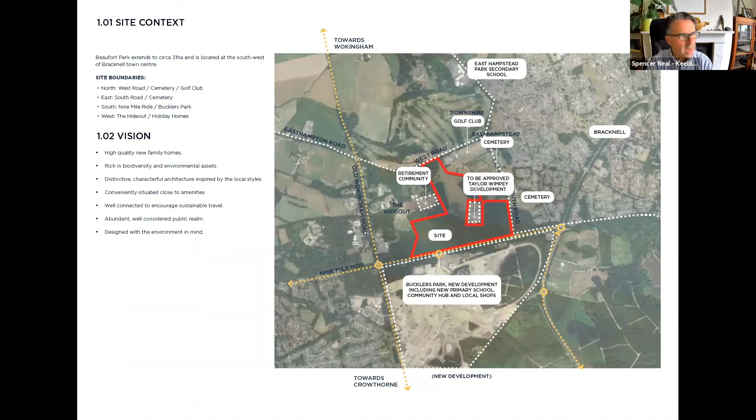I think we can move on to the next slide, which gets into a bit more detail. Can you talk us through this? Yes - this is a little diagram representing the overall site boundary. You can pick out the words 'Nine Mile Ride' at the bottom, which is one of the bounding roads. To the right is South Road, running north-south, and at the top is West Road. So those are the three main roads that constrain the site.

To the south, you have a very strong tree boundary of the commercial timber plantation, and there's an image on the side giving you the sense of a country road. This is really important for us because we feel it should permeate through the entire development as a design process - keeping it landscape-led, with a natural feel, so there's no sense of development nearby. People driving down Nine Mile Ride won't actually see any difference.

So the sense, what they see there on the left-hand side is pretty much what they will see in the future. The only difference, however, is the main access, and that's where the roundabout is to the west of Nine Mile Ride, and that will be the entry gate, and that's where you see that little bit of white gap along the

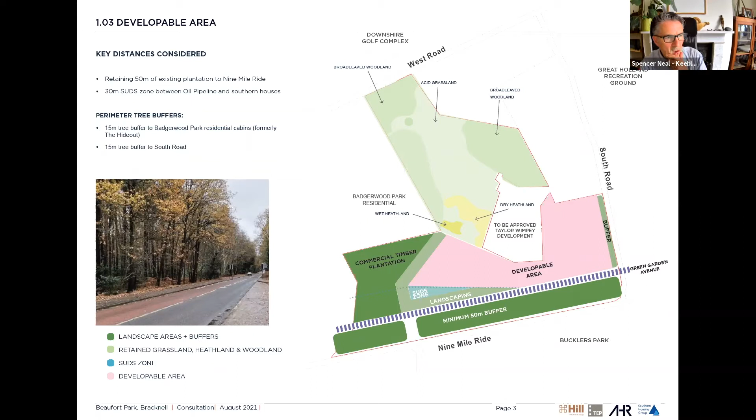So this is where we start talking about the connections and the permeability of the developed area and its links with the wider community. We've had a question from Janet, essentially about our reference to local amenity, Bucklers Park, which I think is the Cala Homes development. But the query is those are not actually planned. And I'm wondering if anybody is able to answer: what will people on our development be able to do for local amenities?

So sorry, what was the query there? So the query is that we've made reference to amenities at Bucklers Park, but there's nothing actually planned, and I'm not sure what your plan is or your thinking is as to how to make sure that people living at Beaufort Park are able to access amenities, which I think is a good question. Yeah, no, very good question.

So one of the things we're talking about at the end is timescales, and obviously the Bucklers Park development is quite a long way ahead of us already, and a lot of that development is coming out of the ground already, and the infrastructure to come alongside it is also on its way. So by the time that we are, if planning permission is granted, by the time we're actually building out these houses and people start living in it, Bucklers Park will be substantially complete.

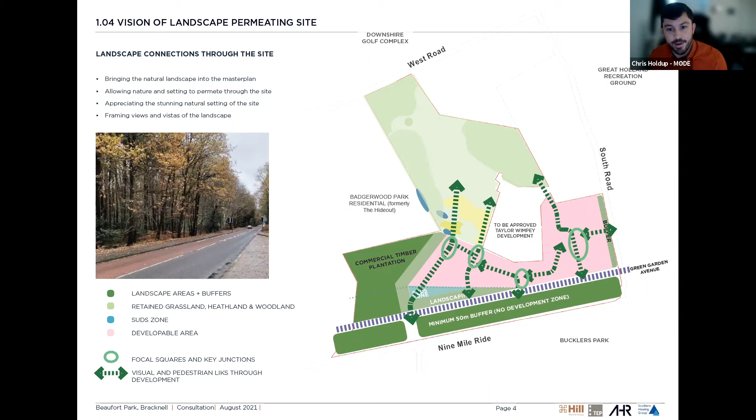Happy to answer that one, Spencer, that would help. We've been alive to that one all along, and really it's a good reason why the high quality roundabout access, in the way that we're showing it, would mean that you don't expect that to happen.

What I would say is that a comprehensive transport assessment is being submitted with the planning application. We'll be making use of the council's own strategic traffic model, and if there are things that don't quite happen as expected, that'll get picked up and we'll make sure there aren't any undue impacts as a result. But we're not expecting that to happen.

You provide a roundabout, as you can see there, and the ability to get off South Road and straight down to Nine Mile Ride. It's about getting onto Nine Mile Ride and keeping the free flow of traffic along there, not having rat running along other places.

Will you be doing any kind of movement assessments, traffic assessments as the project progresses? Because people are asking, as you can see from the questions coming through from Janet and an anonymous attendee, a number of people have been asking about the increased traffic. I suppose the obvious answer is we'd need to know how much we expect the traffic to increase by. Do we have an answer on that yet, or is that coming later?

Yeah, we absolutely have an answer on that. Not a day goes by at the moment where we're not looking at that, and we're working very closely with the highways team at Bracknell on how we assess it, because it's really important — important for this planning application and for their local plan, which is why they have a strategic traffic model. They've had that for a number of years and continue to use it, including for the local plan and for this site.

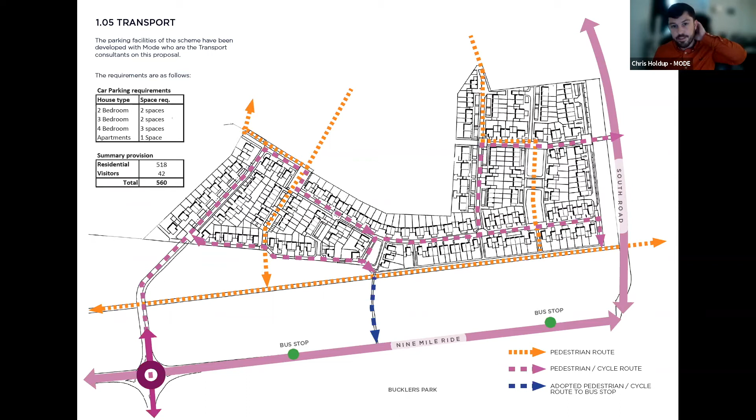All of that will go into a comprehensive transport assessment, and we'd encourage anyone interested to have a good read of it when it goes in. It'll be very detailed and will pick up on potential concerns about increased congestion. We will be generating more traffic — it's extra housing, and that's what happens, isn't it? But it's about checking, making sure nothing untoward happens, and if we need to mitigate, we'll be doing that as well.

Okay, no, I appreciate that. Perhaps there's another query. People are very interested in the SANG, and we will come on to that later, including the routes through to the SANG and from our SANG and safeguarded land through to neighbouring SANGs.

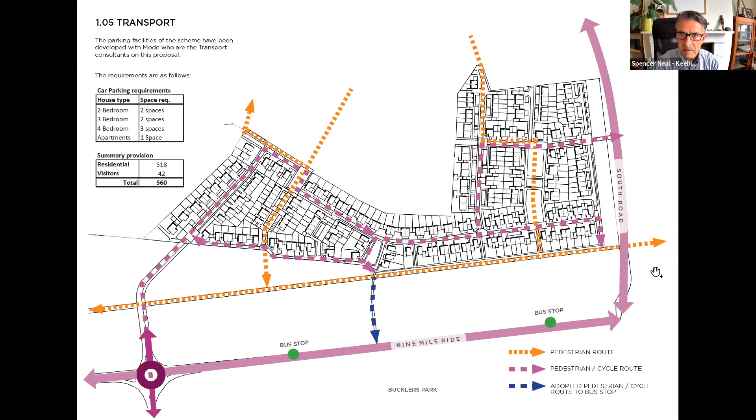But if we just move on to the next slide. Thank you, Chris, that's really helpful. I think we come again more to the creative design element, which I think I can ask Spencer to just talk us through a bit.

Sure. You've got a bit more definition here in terms of your thinking on the house types. Well, first of all, I think it's important to say this is an indicative master plan, and this is how we've distributed the family homes here. The family homes range from 2 beds to 4 beds.

There is a very small sliver of apartments, but these are 2-storey and walk-up, so each apartment has its own private entrance, as you can see in purple there. But just to lead you through the master plan, to give you a sense of what we're trying to achieve, if we go from the roundabout with the arrow, there you go.

Then as you go up and you pass the plantation, and then you take a right bend, and on this bend, you see on either side of it an expanse of open space - it's the attenuation basin and play areas. So it creates a very attractive space.

We had a question on those attenuation ponds - how does that contribute to the management of water, and what's the risk of there being increased flooding, for example, at the Bucklers Park residential area?

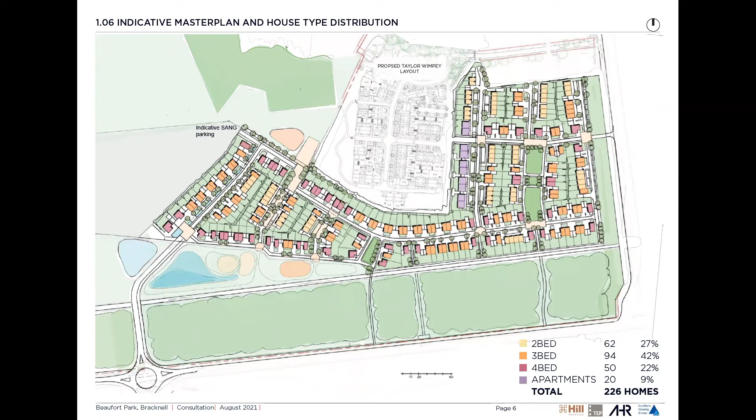I guess it's something that can be discussed with the council as to whether there's any opportunity to perhaps incorporate improvements off site. For Seth, as responsible for delivery - one of the concerns is also that during construction and site enabling works, can you do anything with contractors to stop them from clogging up local drains?

Even for the construction period, one of the questions in the Q&A is about the sensitive boundary to the cemetery. As you can all expect, we can't promise there will be no noise during the construction and delivery of these homes, but we have a number of tried and tested methods to minimize noise disruption during construction. A specific example being air compressors, which can be very noisy, using silencers for them really helps bring down the noise. We also have deliberate plans to avoid having deliveries at peak times and other things like that, so it's something we're very live to from a delivery perspective.

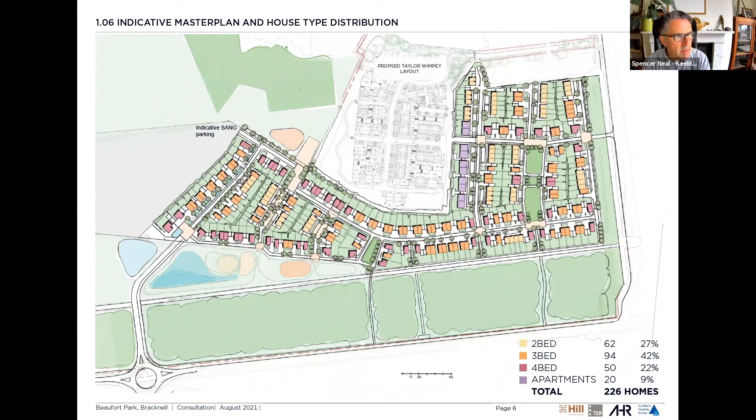There's a slide coming up which shows the sort of pedestrian routes in the SANG, doesn't it? I believe so, yes. And we're going to be moving more onto the next slide, please, Will.

This explains a little bit about the character areas, and I think perhaps we can come back to that, because I think we need to kind of move on to SANG, so let's just jump on ahead, Will.

I think this helps answer a lot of the queries we've been getting. So slightly ahead of the plan, Clare, if you'd like to jump in and talk us through what's safeguarded land, what's SANG, and a question coming up from a number of people is, what kind of protection will the residents of what is now referred to as Bucklers Park have.

Okay, so picking up first on the point about the Taylor Wimpey development, that development has its own agreement in terms of SANG provision off-site. So yes, Taylor Wimpey residents will benefit from this new SANG being adjacent, but it's not required to deliver their site. We will be delivering about 5.5 hectares of SANG, which is an over provision for the 226 units proposed as part of the Southern Housing application.

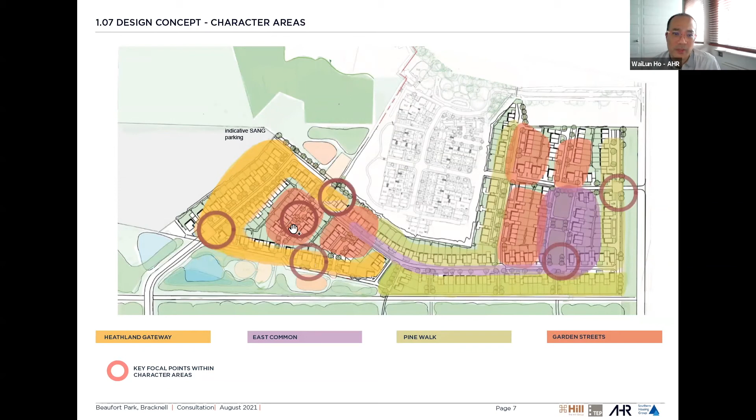One of the visions we have is in the second slide after this one—that's the entry gates, which the circle represents. If we jump to the next slide, it gives another view—yes, this is that linear park, sort of green space. One thing we haven't really spoken about is that the park itself is designed so that it doesn't allow through traffic.

The park itself stops cars from going through. I think one of the questions we've had is whether people will be able to drive through from one access point to the other.

No. There will be points where we use natural ways of stopping traffic, whether bollards or a tree in the middle, so cars are prevented, but it doesn't prevent pedestrians and cyclists. Since this is the landscape section, perhaps Nicola would like to come in and explain the strategy and how that helps give pedestrians and cyclists more priority.

We're very conscious that this development occupies land currently full of forest plantation trees, so we want to ensure we don't lose that important character of the place. The landscape design draws on those natural features, like the plantation forest, to bring character into the development. Within the development area there will be plenty of trees, both along the streets and in front gardens, but also in the amenity open spaces.

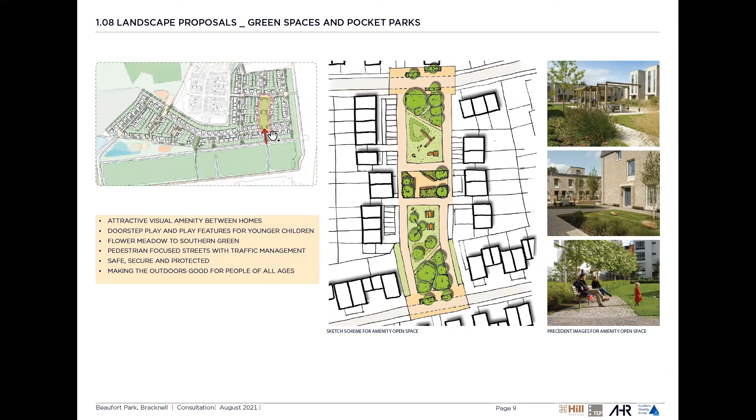Thank you, that helps answer that, I hope. Yes, maybe one day we can look forward to slightly less traffic as people have fewer reasons to commute. So I'm just looking to see if there's any questions we've not covered.

Did Chris want to say something? Nicola puts it really well. There are at-grade crossings over 9 Mile Ride, and there are also signalised crossings, so the traffic will be stopped. There's an existing one near the roundabout, and there's also a new one going in as part of the Bucklers Park development, so it will be a pretty convenient way to cross 9 Mile Ride.

Can I just ask, what does at-grade crossing mean? Without a bridge, without going under the road. Right, okay, thank you, it'd just be a way to help you get over. I was thinking I could, I didn't know what that meant. No, thanks for that.

Going back to some of the things Nicola and Clare have referenced, what are the changes we're proposing going to do to biodiversity? I think that's a Clare question. Is it perhaps? Yeah, probably is for me.

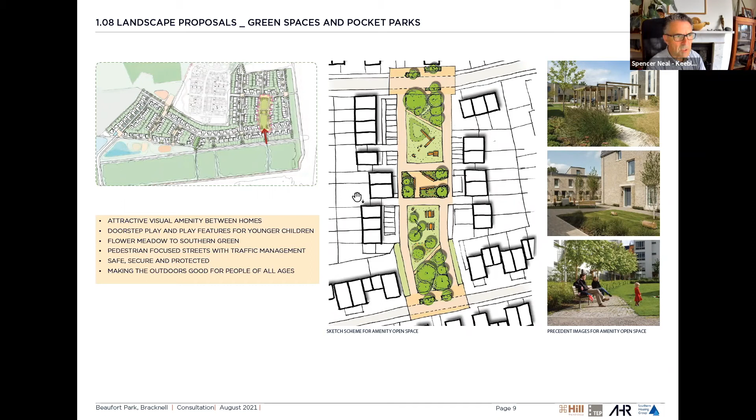How can we make sure that they are able to play safely, but also that it won't be in areas where they're likely to disturb others? I can help with this question. They won't be rounded up and forced to play in child-only zones.

We're hoping we can generate really fun and interesting play areas across the development in a number of different locations. We're guided by the local authority planning requirements, there's a policy which sets out how much play we need to provide on a new development according to the number of people and families that will live here. We look at those figures and calculate the area, the quantity of play space needed to meet the council's standards, and those standards are also divided into different types of play for different age groups.

So we'll be providing a variety of play areas. Some will be equipped playgrounds. This sketch here is showing an illustration of how we might create a play area on the edge of the forest. The play for 5 to 11-year-olds, where the cursor is now, would be in a public amenity space with equipment. For older children, we're thinking of creating more adventurous play within the retained trees in the plantation forest a little further south, a bit further from the homes, utilising the natural landscape to create fun and adventurous play.

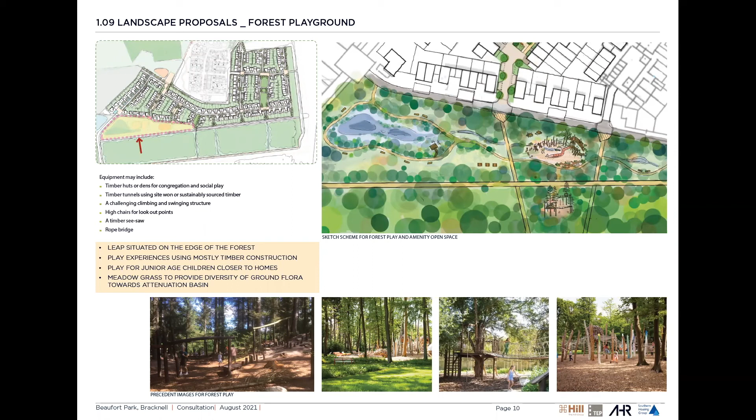We've had a query about whether putting play areas into what we were referring to as a buffer diminishes the value of the buffer in any way. No, I don't think it does. There is a big move at the moment to make green infrastructure, the term we use for a variety of types of landscape, really multifunctional. As part of the sustainability strategy for the site, it's important we make the areas as multifunctional as possible, and by introducing play into the forest area we're not reducing its function in terms of visibility or separation. The tree cover still stays, and you still get the 50-meter depth of tree planting along Nine Mile Ride, so that still acts as the separation and keeps the visual barrier between the road and the new homes.

If the timbers do rot at all, that just adds substrate for insects, beetles, and wood-boring creatures, fungi, and other flora and fauna. Yes, it's oh, to be a child.

Thank you very much, Nicola. That's really useful. I don't know if anybody else wants to jump in and talk about biodiversity or anything. I'm thinking that we're aiming for a net gain overall. Is that right?

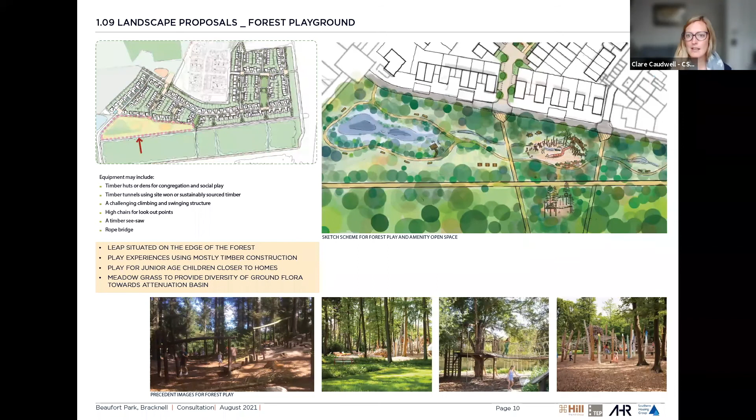Oh, Clare, do you want to take that one? In terms of biodiversity, we'll be submitting a biodiversity net gain assessment as part of the planning application, which we've been discussing. There's a new metric for calculating biodiversity net gain in terms of habitat losses, gains, and enhancements. We've been discussing that with the council, and once we have a fixed master plan and know all the details of what landscaping will be provided, we'll be finalising that.

I can see that Carol is very concerned that any kind of felling is going to be detrimental, and I think it's worth going back. We don't have to jump back to the original slide, but this is a commercial timber plantation at the heart of our site, and without rehearsing all of the rationale, it has been infected, if you like, with foreign invasive rhododendron, which lots of people like the look of, but it's not exactly enhancing biodiversity.

Clare, you were saying earlier that in terms of planting additional trees, that would actually bring back a more local, native mix of tree species. Is that right? Have I understood that properly? Yes. So the loss of the plantation woodland will have an impact. It's not completely neutral, but the value of the commercial plantation woodland versus any native broadleaf woodland that we could create through replacement planting is much lower, and that's borne out in the biodiversity metric we'll submit with the application.

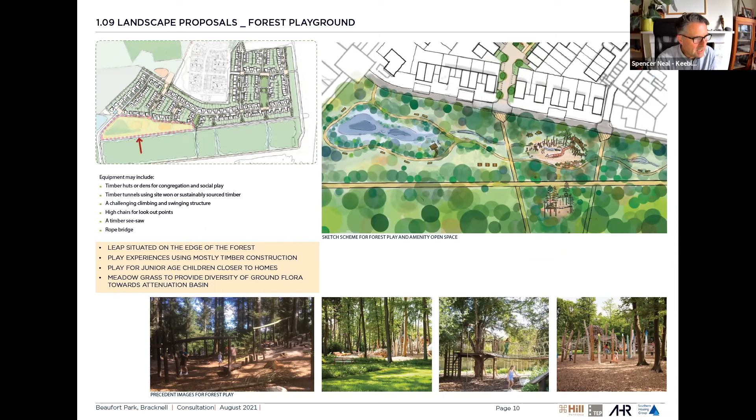Can we go on to the next screen, please, Will? So we've talked about this, and I think we've gone through and looked at the fencing and so on, which separates an element of the safeguarded land from Beaufort Park. We've had a question which James and I spoke about earlier on, to do with the timing of the felling, which rather neatly brings us through to timing, timetable, and phasing. I'm wondering whether we've got a chance to very quickly talk about what time periods we're talking about, and if possible, whether we can have a sense of when any commercial timber would be harvested.

So I think, is that Seth or James? Do you want me to start off with the planning timescales, because that might be the useful part. Brilliant, and then James and Seth Jamie can follow up. So at the moment, we're in discussions with the council in terms of evolving our design until we're in a position to submit the application. We're expecting that we'll get that application submitted by the end of September.

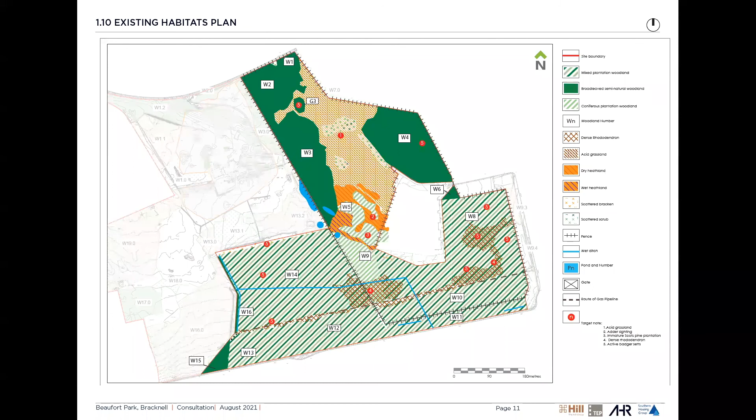No, thank you. Yeah, I think that was the reassurance we're hoping for. Yeah, just to add to that, it would likely be a condition of planning that there would be a wildlife management plan for the construction phase of development, and that would address nesting birds, any issues with any other protected species, any requirements for licensing from Natural England to facilitate that. So that would be a further stage to be secured as part of planning.

I know that there's been some concern about bats, and they're protected, obviously. Yeah. So bats and their roosts are protected by the Habitats Regulations.

If we were in the position where any trees were to be removed where we'd identified bat roosts, we're undertaking a lot of baseline studies for that at the moment, and that would be updated before felling actually occurred, because of the intervening time period between now and when site start might happen. If there were any roosts identified, we would have to identify mitigation for that. The works would have to be timed suitably to avoid a period when the bats were most likely to be present, and the works would have to be covered by a license from Natural England.

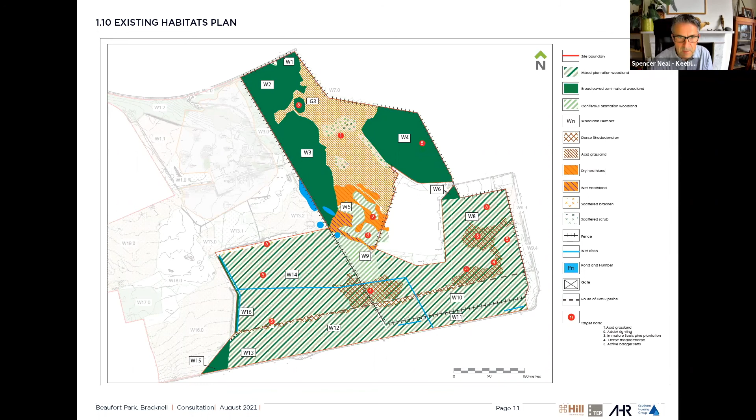We're coming to the last few questions, because, as I said, we are going to be reaching the end in a few minutes. But going back to the Taylor Wimpey situation, are we at all dependent on their timelines for any of our programme?

As Jamie sort of spoke to earlier, whilst these sites are adjacent to, well, neighbour one another, they are going forward separately. So there isn't that interdependency there, aside from the practicalities of them being next door. From a planning and construction perspective, they're not going to be linked.

Jeremy in the audience has asked how we try to reduce the burden, given Taylor Wimpey's 68 homes plus the number of homes to the east of our site, all using South Road. Is there any way we can mitigate the impact of that combined impact? It's a hard one for us to answer on our own, I guess.

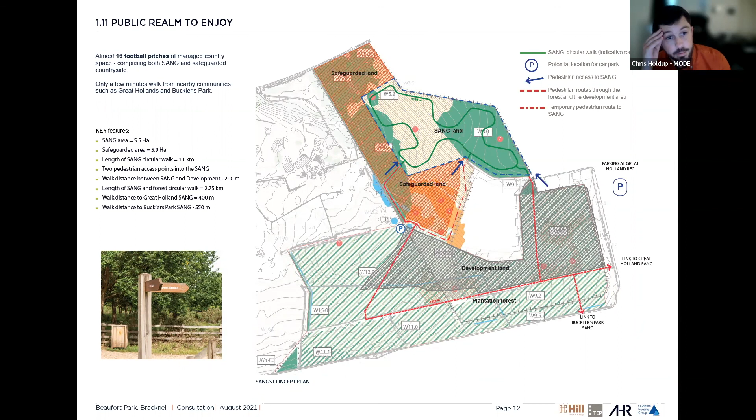So we had a question: is the local authority relying on brownfield sites to meet its housing need? Somebody's asked a question about brownfield sites.

Shall I pick that one up? As I said at the start, the local authority has to decide in its local plan how it meets that need for 10,000 homes over 12, 13 years. My understanding is it simply does not have sufficient capacity to deliver that solely on brownfield land, and thus needs to identify the most sustainable and suitable sites on the edge of Bracknell, of which this is one.

I'd add there's a second reason too: if you focus all your housing sites in central locations in Bracknell town centre, all you're going to see delivered is flatted development, and we know there's a big demand for more houses at the moment. A district like Bracknell needs a really wide variety of different forms of homes for the people of Bracknell Forest, and this scheme will deliver the vast majority of actual houses with gardens.

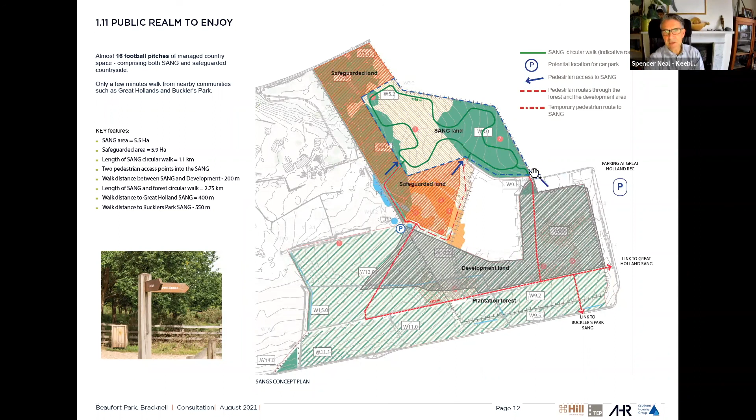Brilliant, thank you - you have the privilege of having answered the last question. Thank you very much, Claire. It's been a roller coaster evening. Thank you very much to the panel.